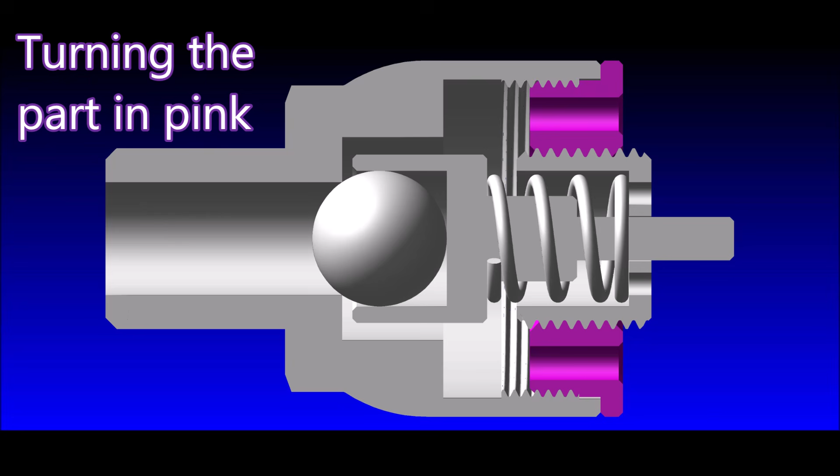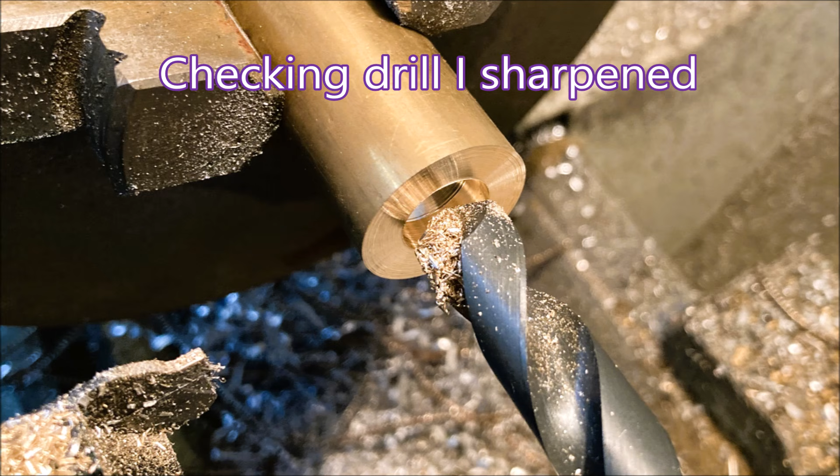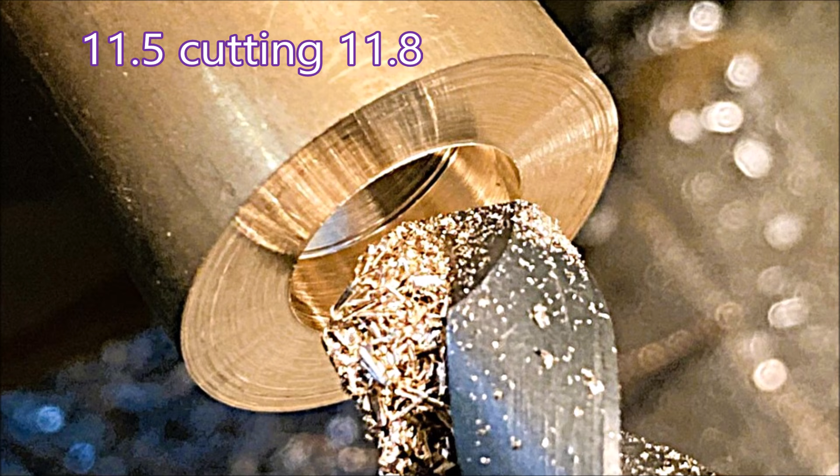This is drilling a hole with a drill that I've just sharpened. Not very well. Instead of cutting 11.5, it's cutting 11.8. The two rings you can see at the bottom of this hole show just how imperfectly I've sharpened the drill.

So I thought I'd try a slot drill in the turret and use it to drill the hole and then bore it out to the right size, but it just wasn't rigid enough in the turret.

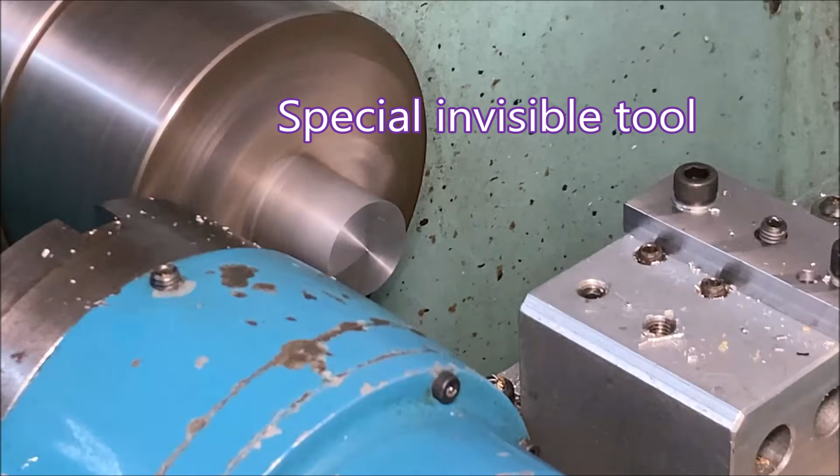So I thought I'd do a setup where I use the slotting drill in the gang block, where it would be nice and rigid. I apologise for these invisible tools. I didn't realise it obviously when I set the camera up.

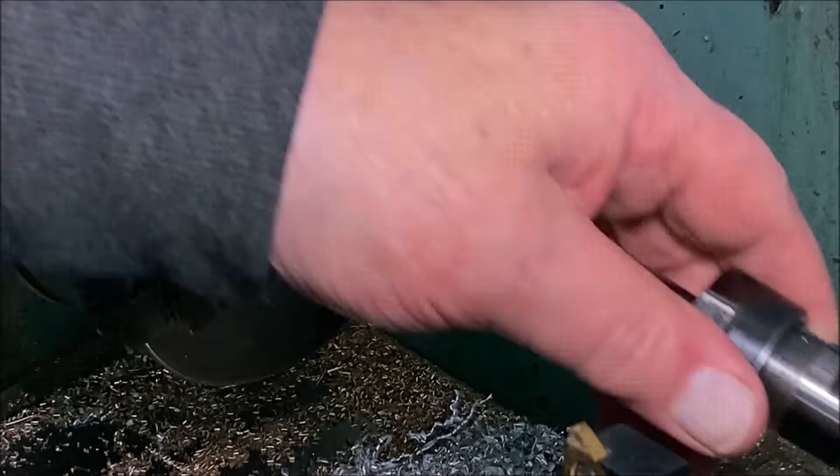So I decided that I'd just, each cycle I'd put the slot drill into the gang block using stops in the program. But I realised that I had no register for the position of the cutting edges on the slot drill, so the hole size could vary all over the place.

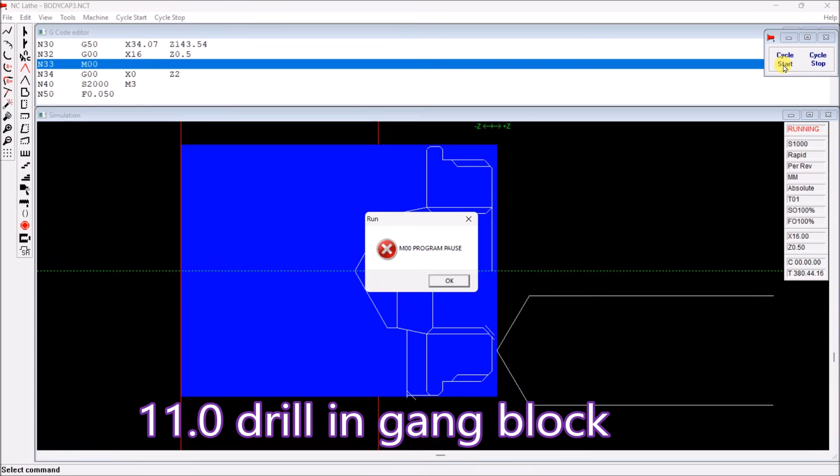So I decided to completely change the program. Use a drill of 11 diameter to start the program off, and then open it out later with a boring bar in the turret. And I thought by separating the drill and the tap

with the boring process, I would make sure that I didn't confuse them and put the drill in when I should have put the tap in, etc, etc.

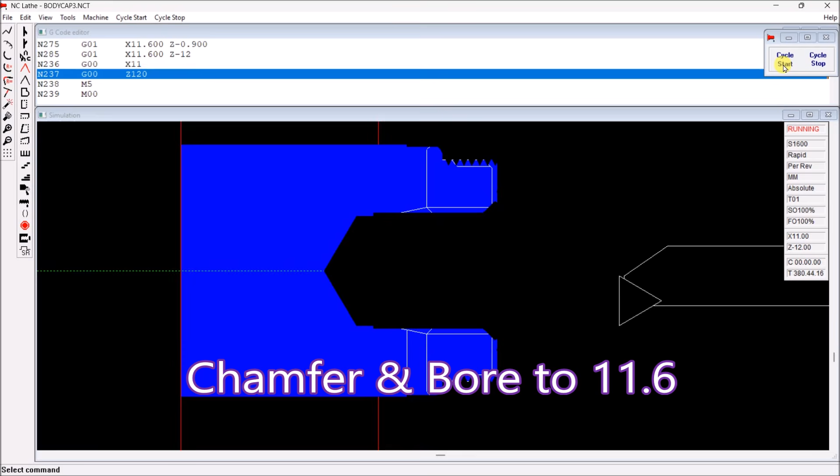Here the boring bar is opening up the bore to 11.6, which is what I wanted as the tapping drill size. The program stops for me to put the tap into the gang block, and I have to put the spring on the back end of it and put the locking pin in place, so it takes a little while.

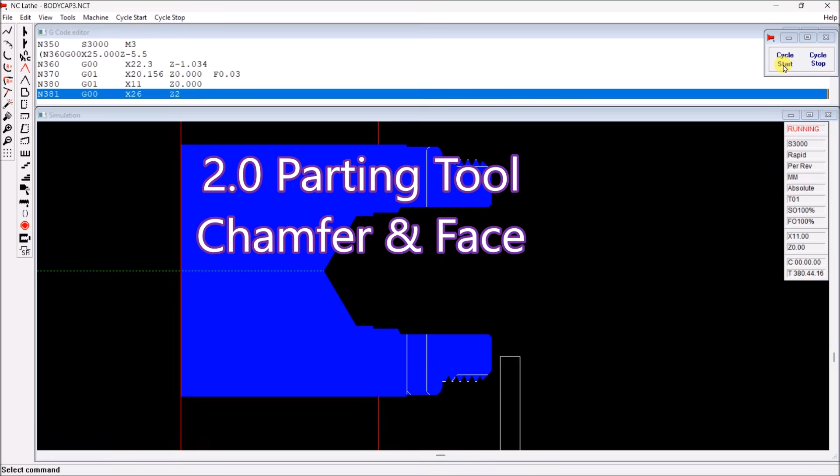I'm only making 10 of these parts in total, so it's really not too much of a drama. I changed the program to chamfer here after the threading because I noticed even though it's only 32 TPI, I was getting a slight burr thrown up by the threading tool when it was previously chamfered.

Right, let's make some chips. I just noticed this is my 19th narration clip and I'm only halfway through the video so far.

Okay, so this is the 11mm drill fitted to the gang block and it's drilling away the material. Now the program stops while I take the drill out of the gang block.

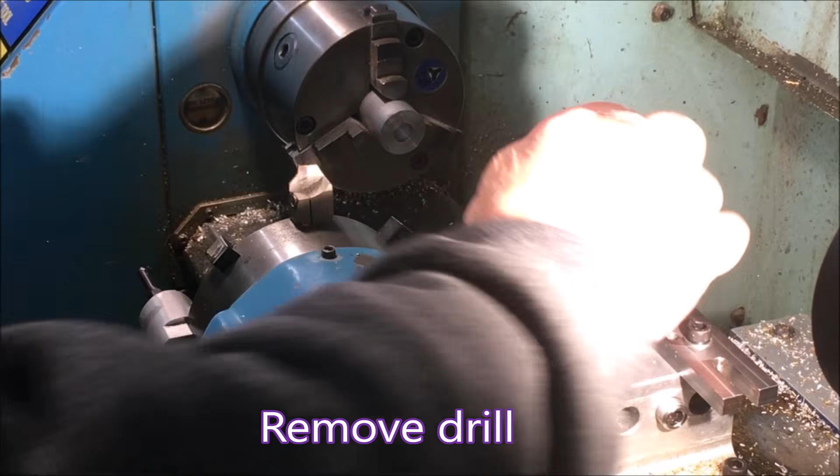Here I'm using a little 3D printed T handle for the hex wrench. Really works well.

So now I push the magic button and the program continues.

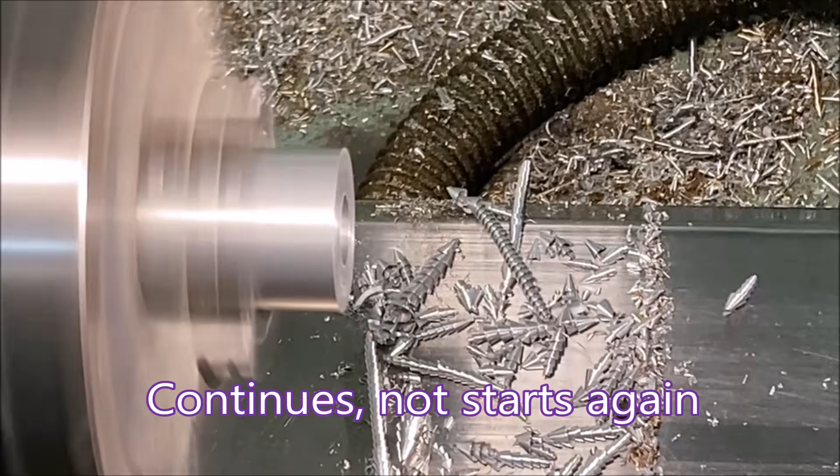Oh, we've got an invisible tool again. At least you can see the material disappearing. That was just a 55-degree turning tool.

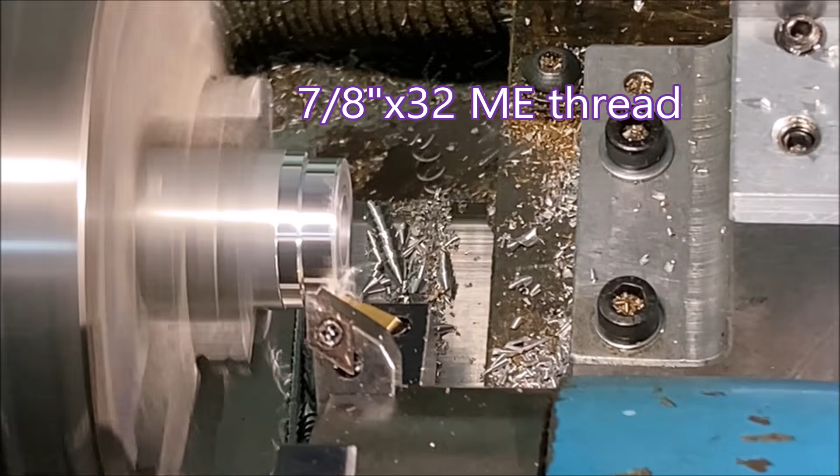And this is a full profile 32 ME thread insert. You can't see the insert, but it's there because you can see the thread being cut. That was at 1600 RPM.

Now we've got this tiny boring bar. Just putting a bit of a chamfer on the start of the thread and taking the hole out to 11.6, which is the size I wanted to use as my tapping drill size.

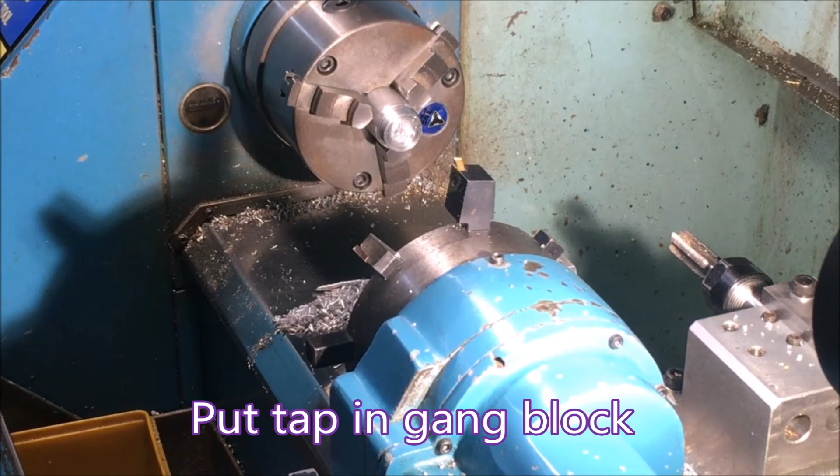There's the boring bar's disappeared. Stop program again. Have to put the tap into the gang block. Fit the spring and the washer and the locking pin. A dab of jungle juice.

1000 RPM. I haven't got the feed set right. It's not feed. The tap's not coming out enough from the floating tap. I just got to slow it down more, that's all.

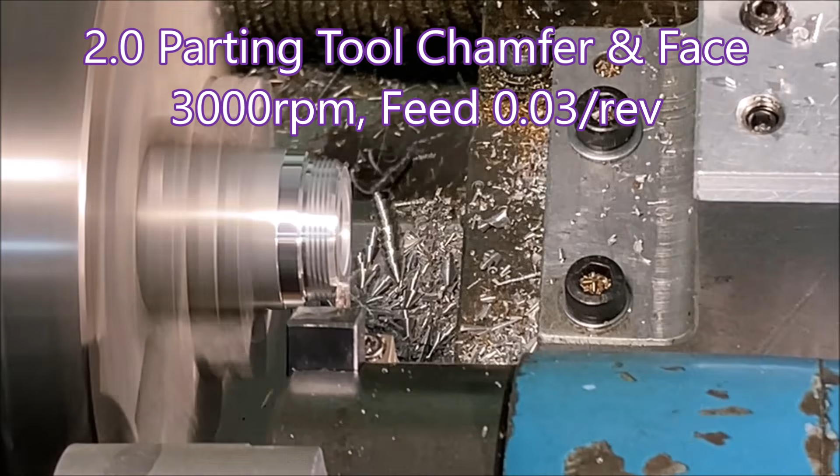The parting tool's putting a chamfer on and facing the part. Then puts a small chamfer on the back and parts the part off. And there you can see the part mid-flight before it hits the floor.

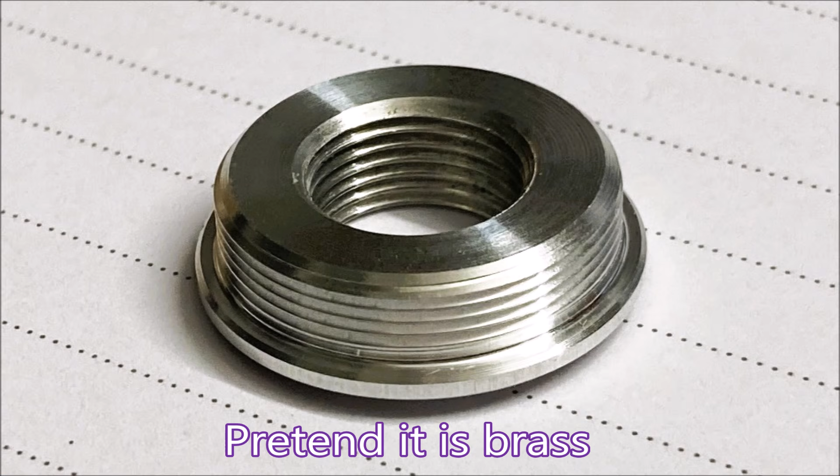This is in aluminium. Please pretend it's in brass, because it will be in brass. I just don't have enough brass material for a lot of messing around getting the program right. This has been a long video for me, so if you're still here, thank you for watching.